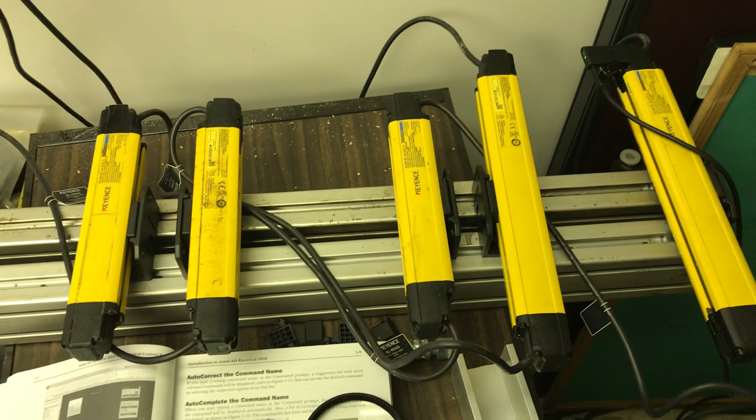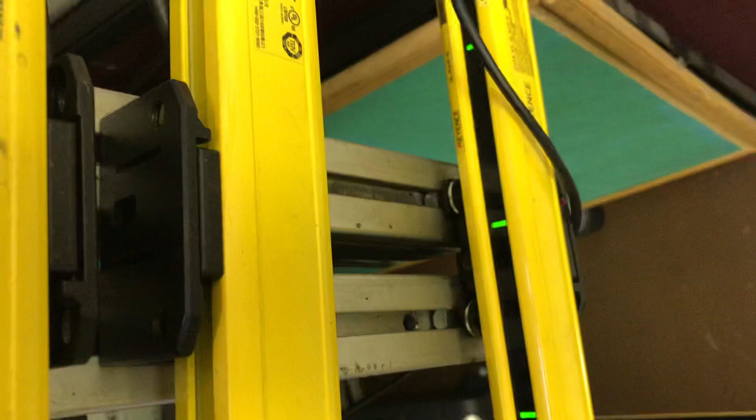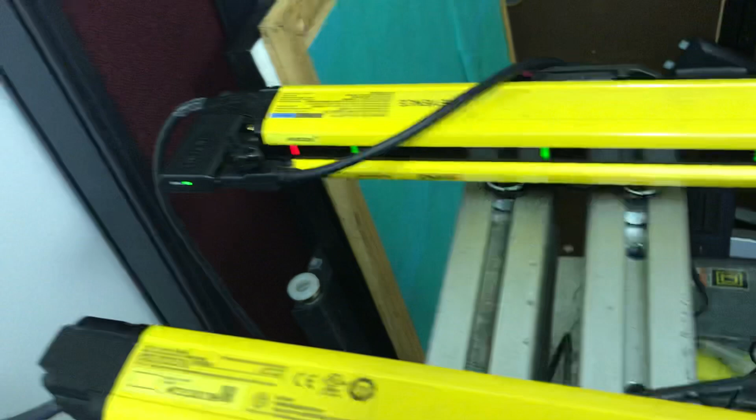And so here's the three light curtains. You can tell they're currently on as they're green. And so watch what happens when I stick my hand in them. See, they go red. So anything between the beams here, when it breaks that beam, and it would do the same for, say, here is another unit that is showing red.

So this unit is not being aligned correctly. That's why it's got red. See, depends on how it's configured. So that is physically the units that we're dealing with.

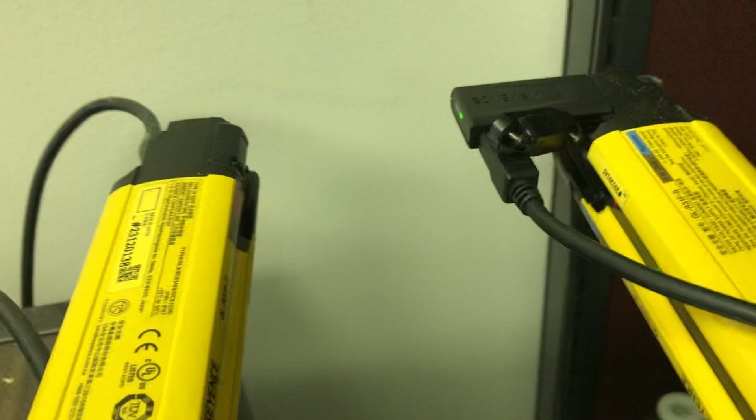Since I'm online, I'm going to say download a configuration file from the unit. So I am plugged into that unit by a USB. So it's telling me that it's downloading. And so what it downloads with is this USB unit that is plugged in. You have to purchase it along with the cable, and from that it physically allows you to go online and configure the unit.

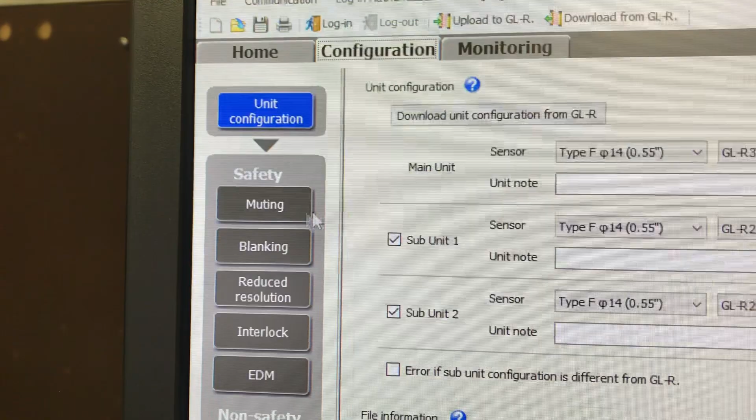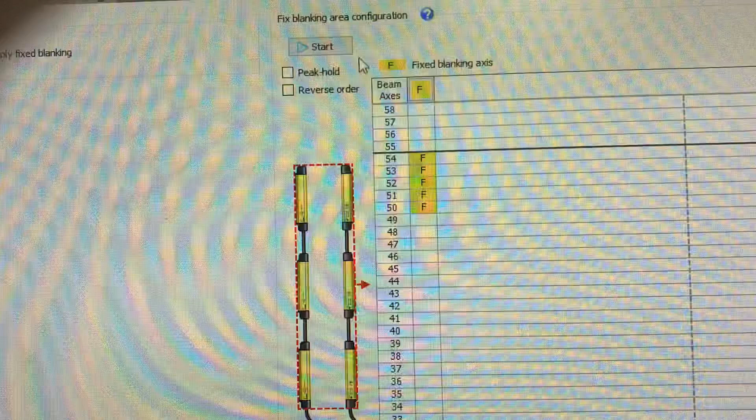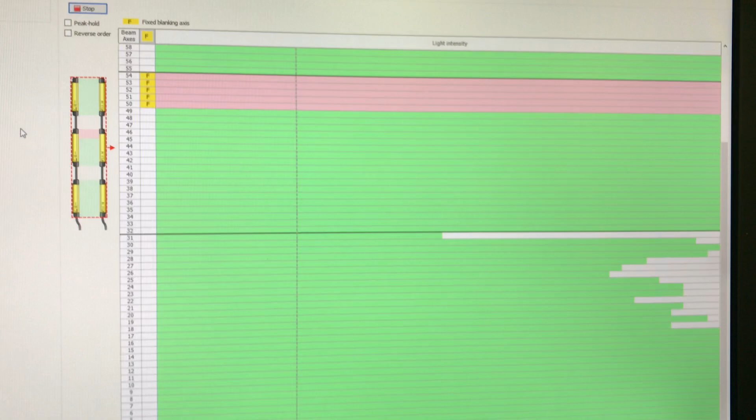So the unit configuration is all three units, and it goes through the connections. Muting, it shows over here your muting, blanking. So blanking is when you say don't look at anything in these areas here, and if I want to see what's going on, you can see how much power the units are. And so if I stick my hand in, you can see that's where my hand is.

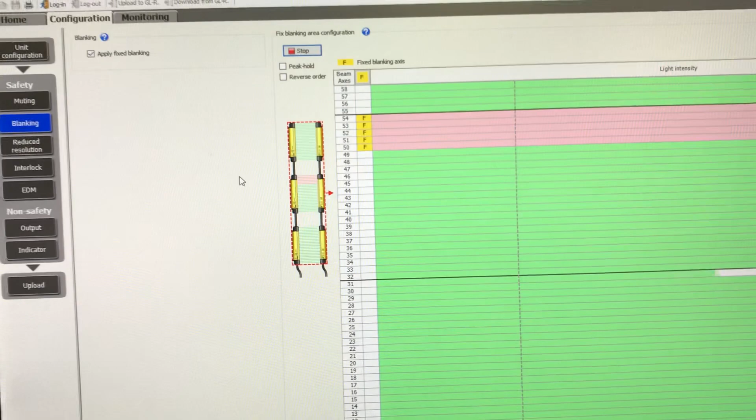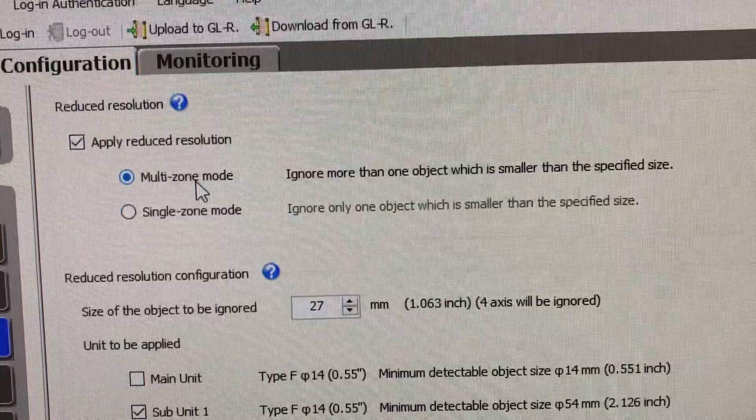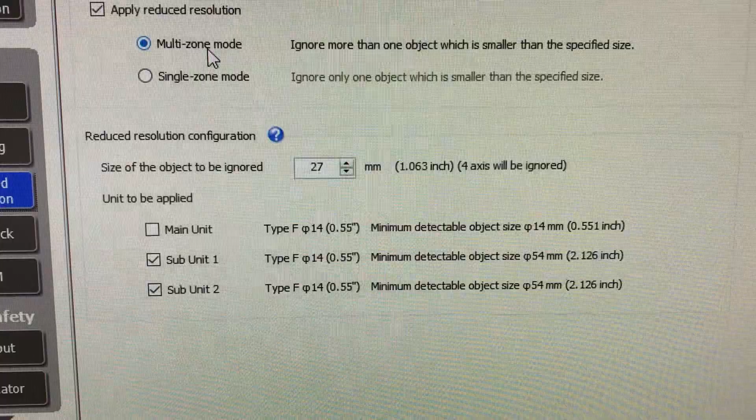So I'm going to stick one finger in, and one finger there is no muting, and the reduced resolution here is it's multi-zone mode, so it's going to ignore multiple zones that add up to however the size I've said. And notice I've said 27 millimeters or 1.063 or 4 axes. But I also have unchecked the main unit, which says simply anything that gets in there, even one unit, it's going to shut off the safety relay.

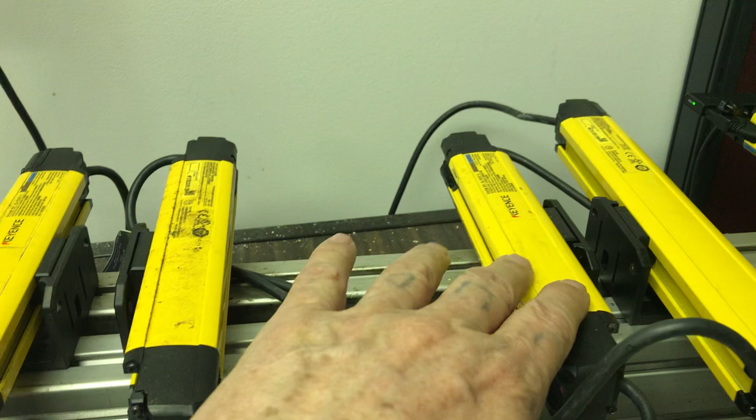So the reduced resolution is only on this unit and this unit. These two are longer or larger, as you can see, than my others. So these are called the 23s. These are the 31s, which means there's 31 LEDs.

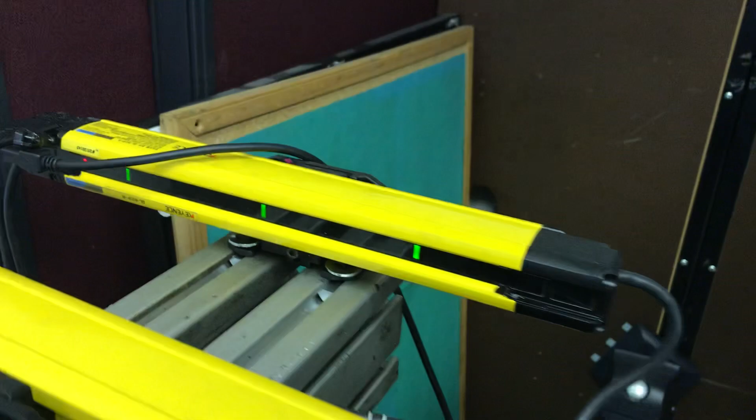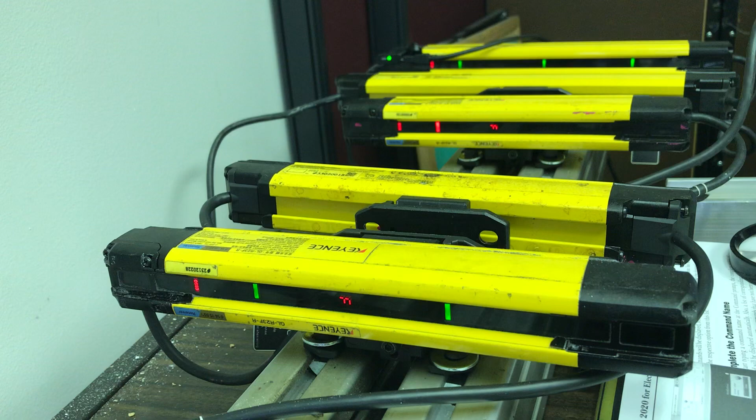So notice if I put one finger in, it turns red. If I do the same thing here, it doesn't turn red because it has a reduced resolution. So if I put multiple fingers in, I can get my relay to open or close. So that is your safety relay.

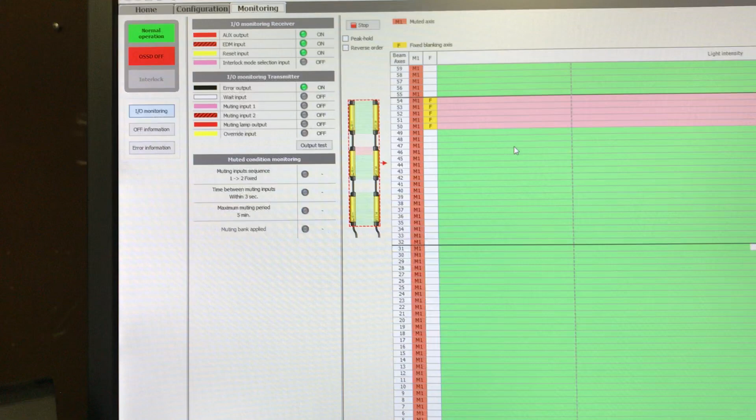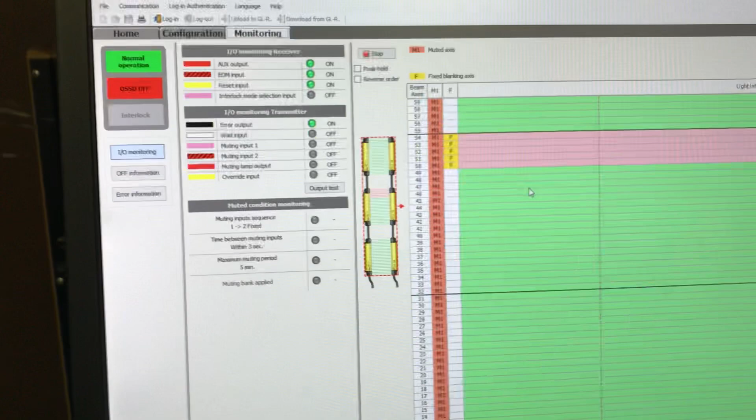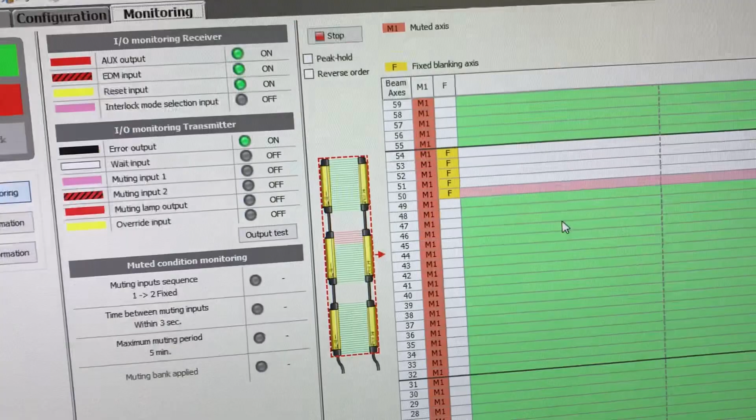Also, we can go to monitoring online. It's going to communicate with it, and where the blank cells are here, you can see the OSSD or the relay is currently off because of the alignment issue with these cells right here. See, when I block, see how it turned back on? Now when I've blocked it, where the pink is, see the pink? So even if it's blocked, if it sees light when it ain't supposed to, it'll fault.

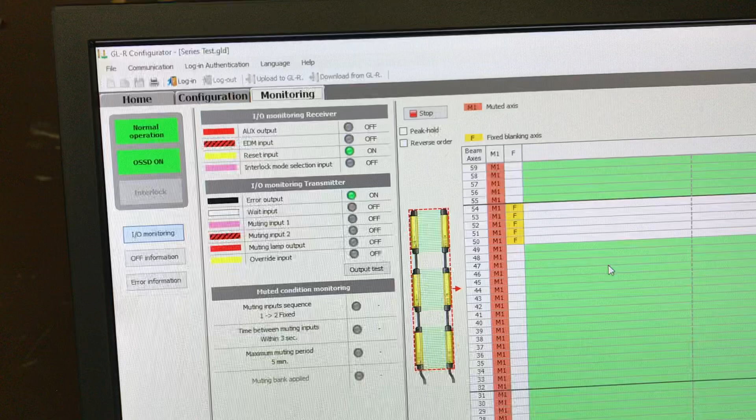Or if I get enough other units on that 1 inch, and so that's how that then is tied into our PLC, which shuts down the rest of the machinery or resets it.